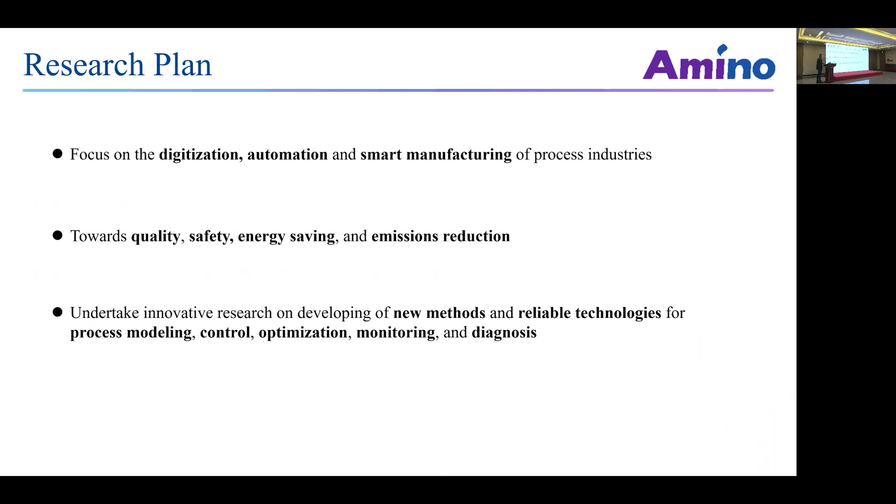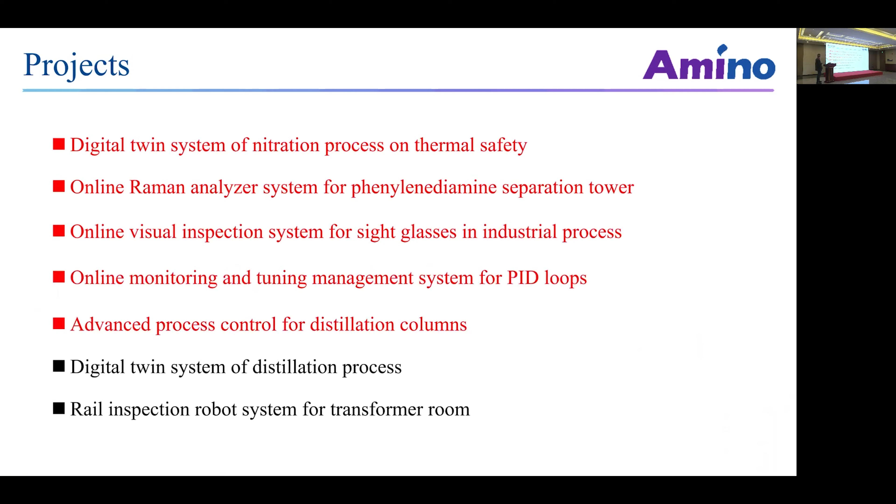The research plan focuses on digitalization, automation, and smart manufacturing of process industries, towards quality, safety, energy saving, and emission reduction. And we undertake innovative research on developing new methods and reliable technologies for process modeling, control, optimization, monitoring, and diagnosis. These are 7 projects we had together, and I will introduce 5 of them. First is the digital twinning system of the nitration process on thermal safety. As Professor Chen has already introduced, this is a major project during our cooperation.

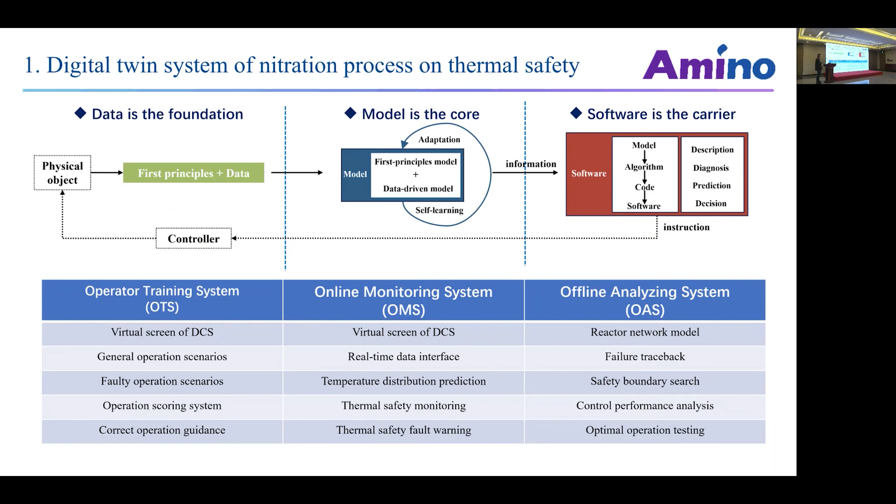Data is the foundation. We provide sufficient data to the model, and the model is the core, software is the carrier, and we have 3 deliverables from the collaboration. One is the operator training system, OTS. One is the online monitoring system, OMS, and the last one is the offline analyzing system, OAS. So these softwares are for 3 layers of people. The OTS is for operators. The online monitoring system is for the engineers. And OAS is for the decision makers.

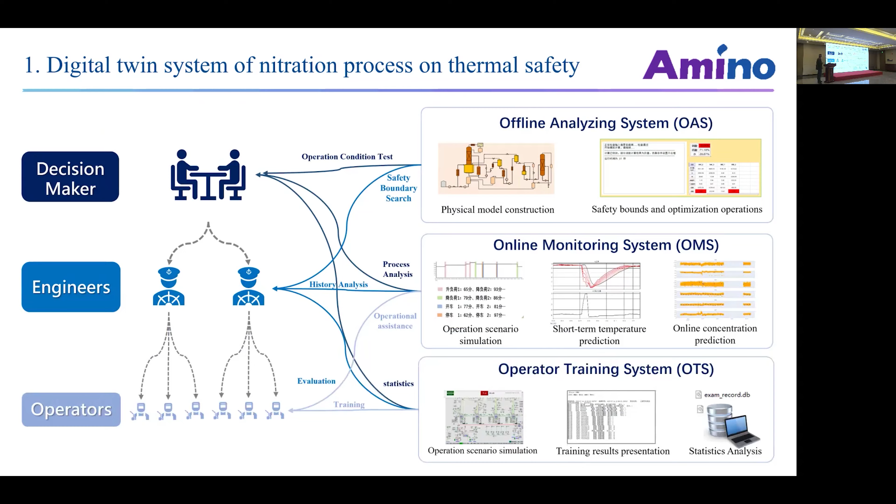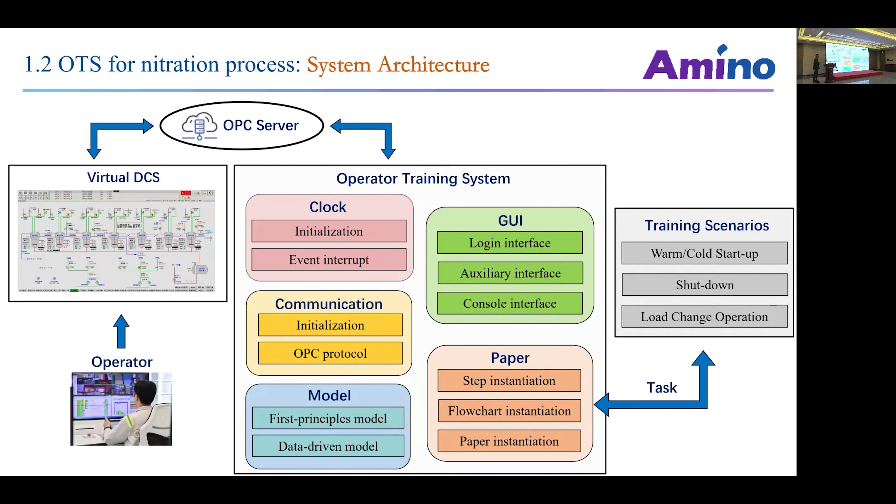This is the structure of the OTS system. So the operator can use a virtual DCS. The virtual DCS is a digital twin of the real DCS. So they can practice their skills offline to improve their operating skills. And this is an example video. Can you run the OTS system?

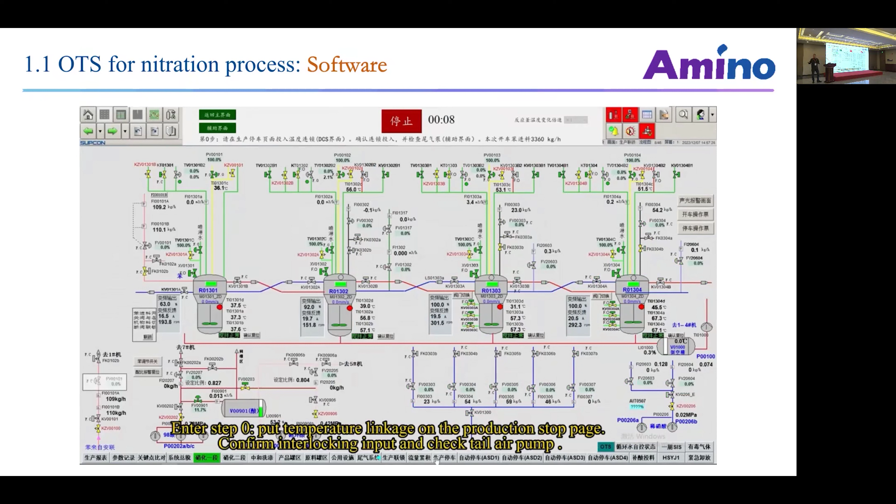And the OMS is an online computing software. This is very important, as Professor Chen has already explained. We have real-time data to the OMS, and then we get data extraction and online evaluation for the operations. The OMS will provide a 5 minutes ahead temperature prediction, which is key to our operation, because as mentioned before, nitration is a very dangerous process. So the 5 minutes ahead prediction is very important to the operation.

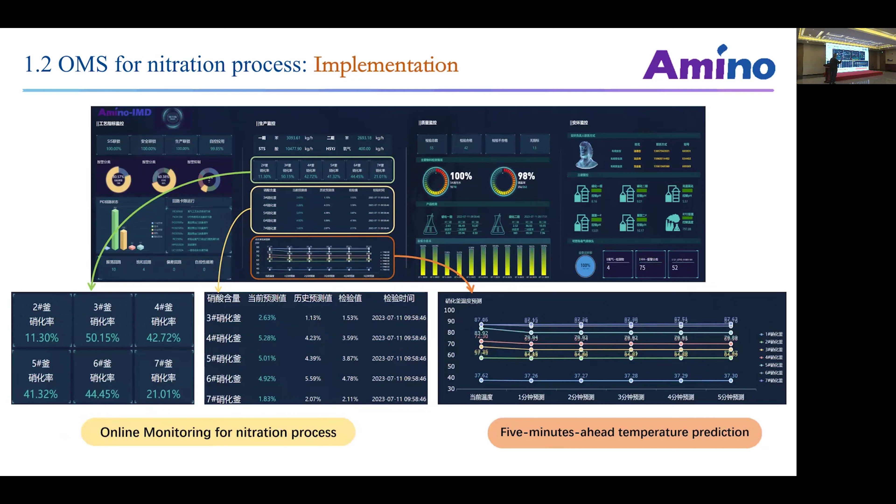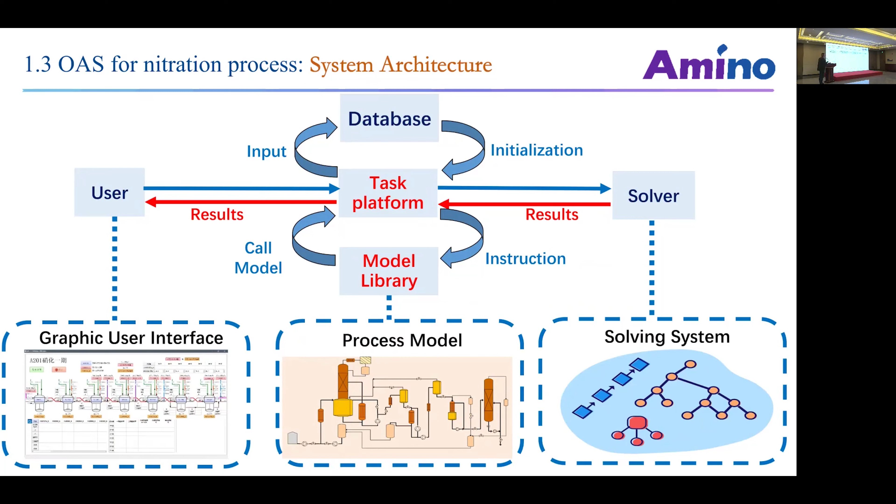This is the system architecture of OAS. It provides the user, the decision maker, with software to do the simulation offline. So it's like this. The decision maker just inputs operating conditions like temperature and loading, and then we do the simulation and get the output.

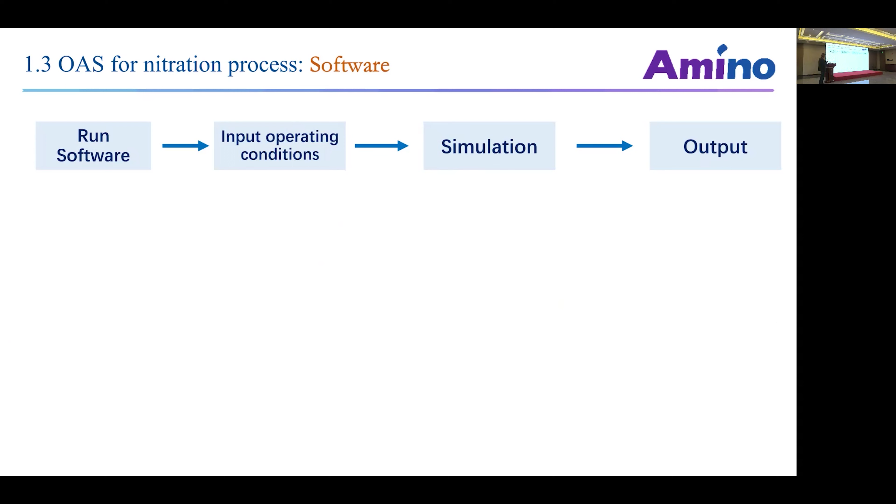Because it is very critical to upload or download the raw material in real time in our real nitration process. So the simulation helps guide us to get a better output. So this is a kind of simulation step by step.

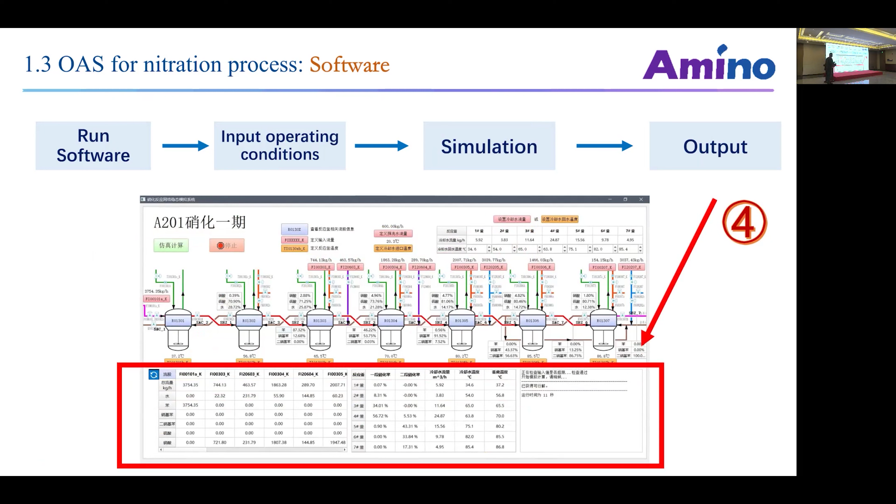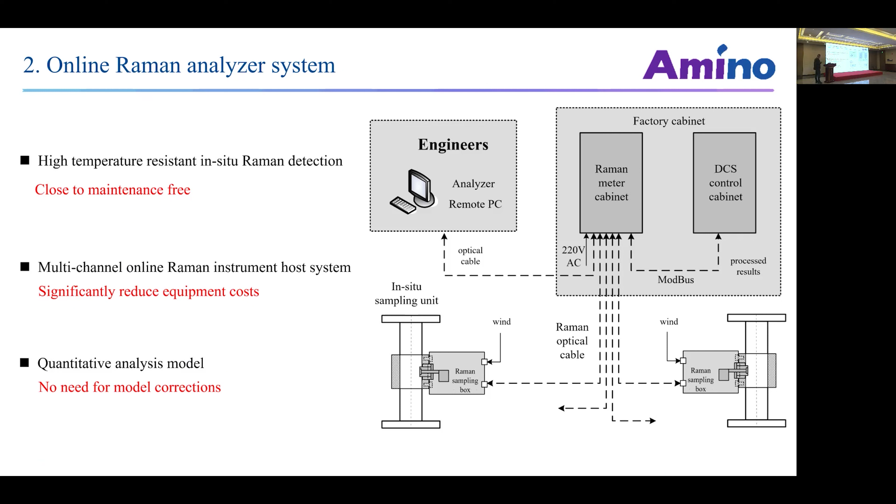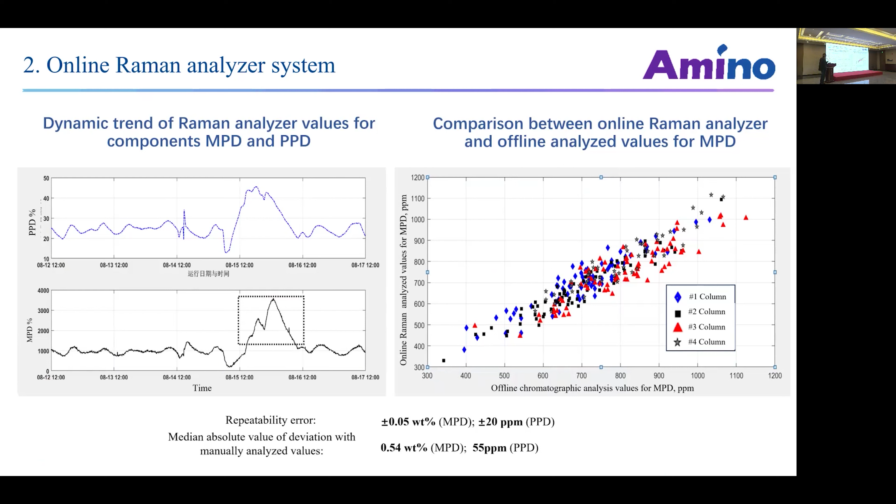On this project, we use a visual inspection system for sight glasses. During nitration, we also have to ask our operators to check the sight glass to see if any abnormal situation happens. So here we have two guidelines. One is liquid level, and another is the color of the nitration materials. So when the liquid level or the color gets to the threshold, an alarm will be sent to operators in the control room. So basically, the workers don't have to go to the site to check the sight glasses.

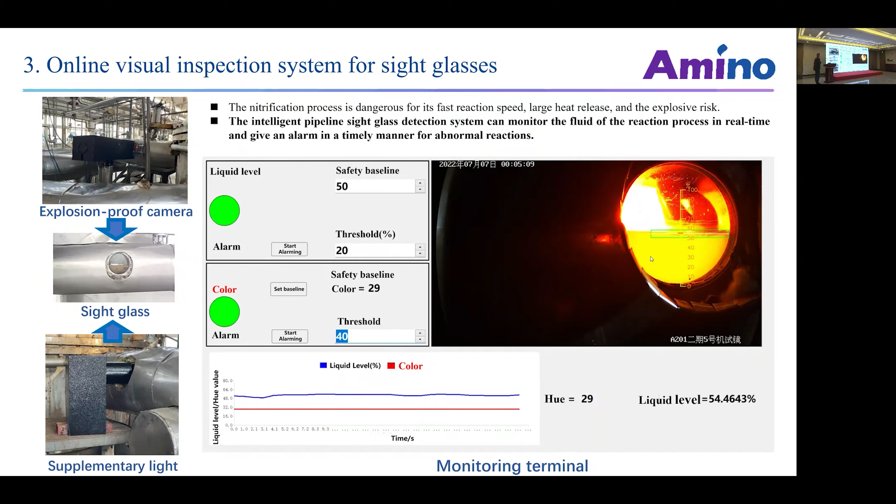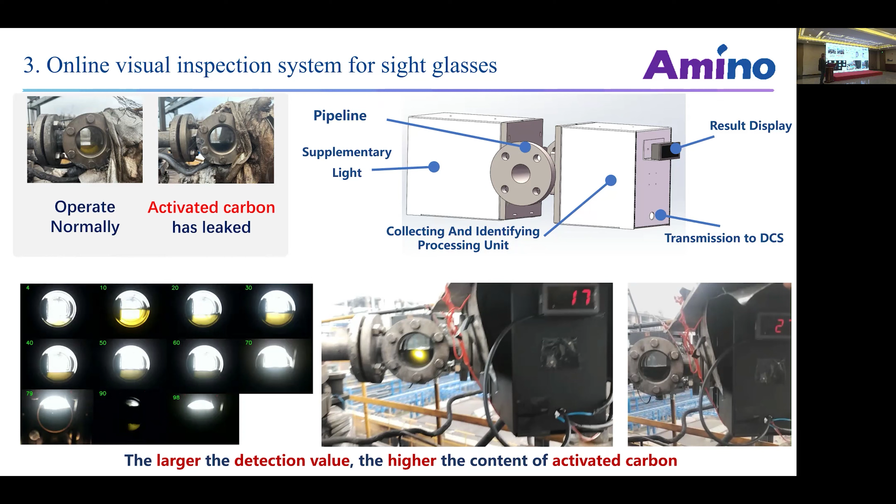This is also an online visual inspection system for sight glasses, which is used in our wastewater treatment. We use activated carbon to treat the wastewater, but the leakage of the activated carbon is a serious problem in our process. By using this detection system, we can easily find the abnormal situation in our process.

And this one is the online monitoring and tuning management system for PID loops. In Amino-Chem, we have more than 4,000 PID loops. So how to manage them is a critical task for us. So we use automatic management of PID loops, which can check the quality of the PID loops automatically. And also, with this technology, we can monitor the loop and tune the loop automatically. By implementing this technology in our plant, we significantly reduce the deviation of our control and reduce the number of alarms.

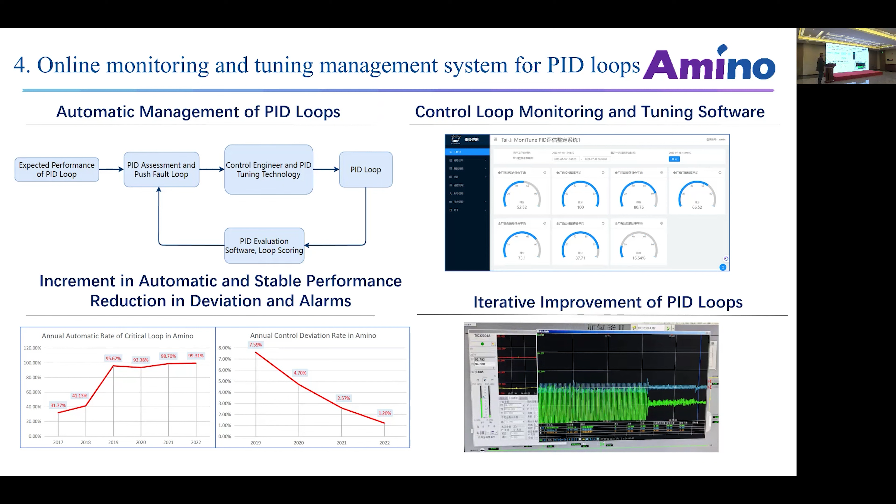The last one is MPC for the distillation towers. With the online Raman analyzer at the top of the distillation column to measure MPD and PPD components, a soft sensor technology is used. And the MPC combines identification methods along with the latest programming technologies. By implementing this MPC on our distillation towers, our product compositions are well controlled, with less deviation in quality, and also very close to the limit.